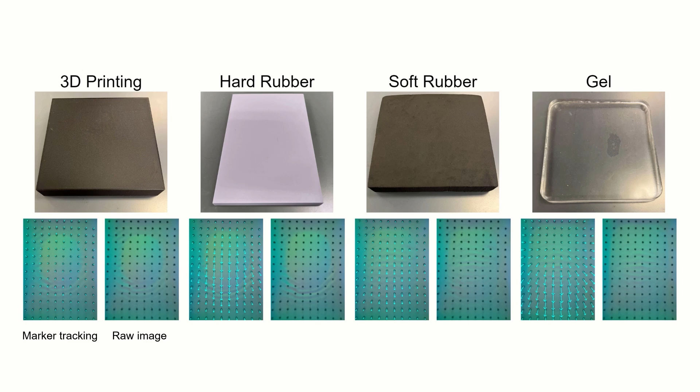To collect the necessary data for training, we used 4 standardized blocks with different material properties. We developed an automatic data collection pipeline that recorded tactile images and gripper states under different grasping forces and external drag forces. Finally, we recorded the gripper positions when slipping occurs as labels.

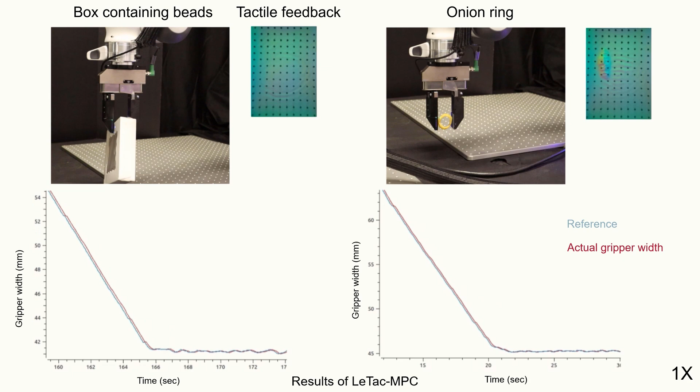In the first task, the goal was to grasp various daily objects. When the object came into contact with the gripper, the gripper width gradually converged. After this, the manipulator dynamically transported the object to the target location.

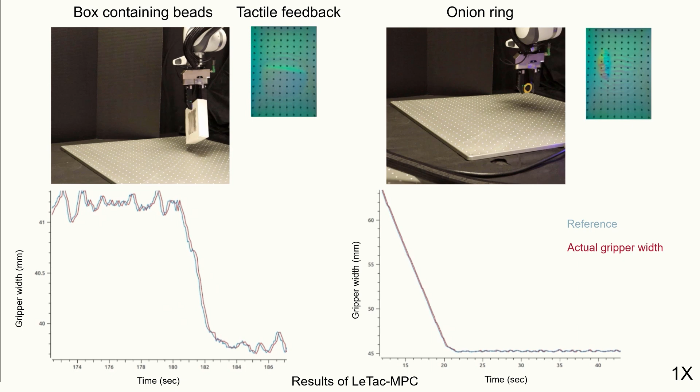For objects with rapid changes in acceleration and inertia, such as a box containing beads, the LeTac-MPC enabled the gripper to reactively regrasp the object to stabilize it in hand. Finally, the gripper width converged again.

Although the tactile feedback for soft objects is subtle, LeTac-MPC can still converge and grasp them robustly.

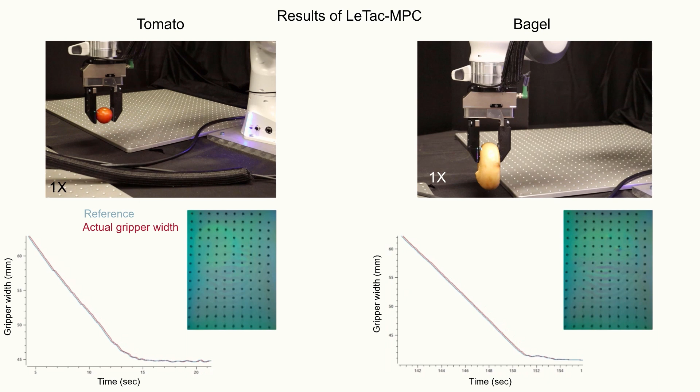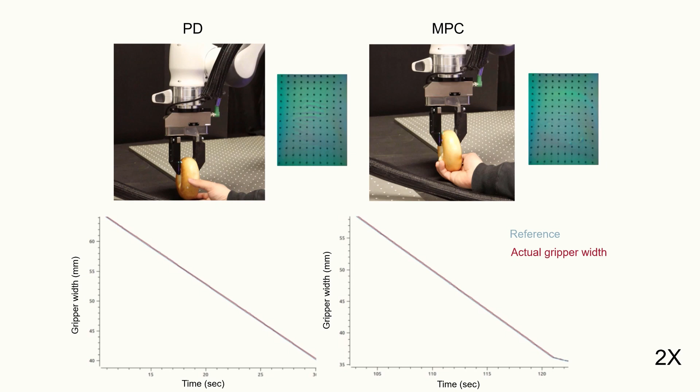However, we observed that both MPC and PD controllers failed to converge, and the gripper motion could not track the reference generated by the grasping controller. This indicates the MPC and PD controllers continually decrease the gripper width until it reaches the force limit of the gripper.

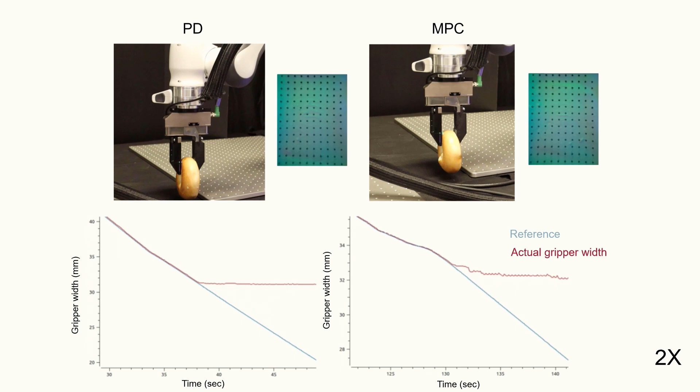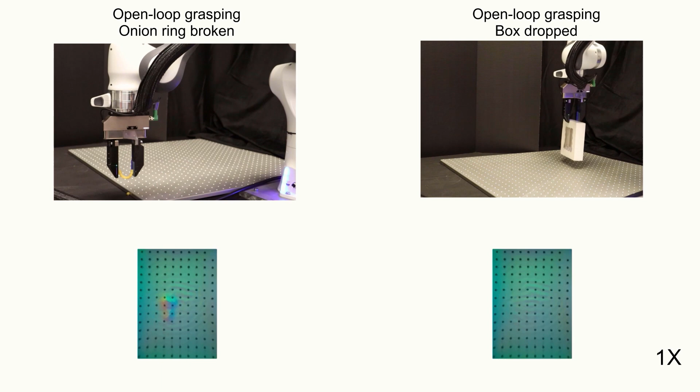For open-loop grasping, because it cannot reactively grasp based on the feedback, it will destroy fragile objects like onion rings and drop objects during dynamic transportation.

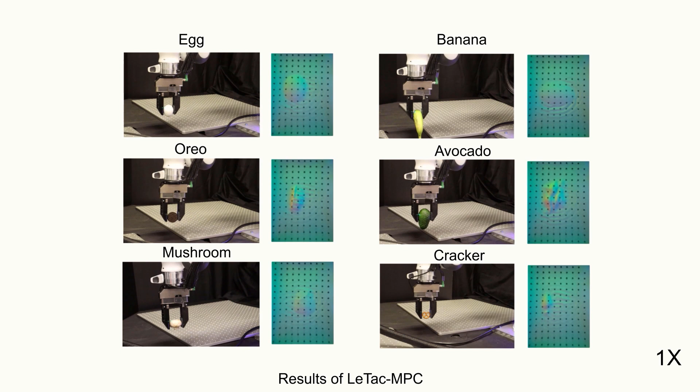Our proposed LeTac-MPC demonstrated excellent generalization abilities. Despite being trained on a limited dataset consisting of only 4 standardized blocks, LeTac-MPC was able to successfully grasp various objects with different physical properties, sizes, shapes, and surface textures.

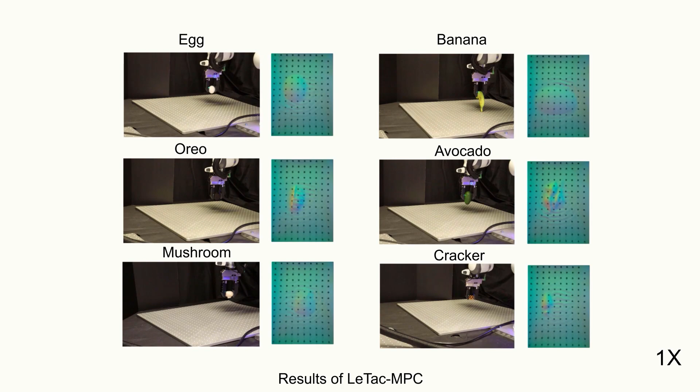Finally, we attempted to grasp a peeled boiled egg, which proved to be an extreme case and an ultimately unsuccessful experiment. The tactile feedback generated by the egg was so subtle that it was almost invisible, regardless of how much the gripper continued to contract.

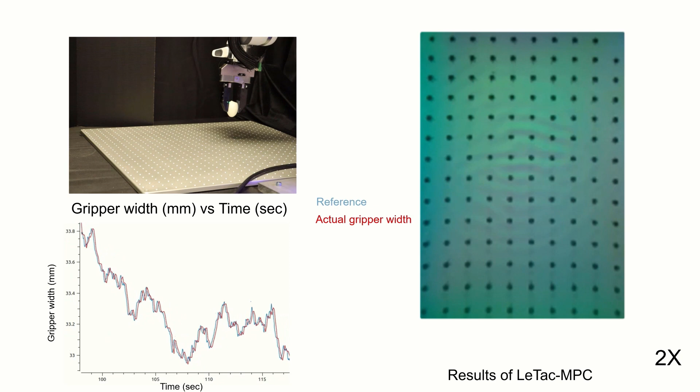This resulted in incomplete convergence of the controller, causing the gripper to slowly contract at a very small speed. As the egg deformed and slipped in the gripper, the speed of contraction of the gripper increased, eventually leading to the destruction of the egg.

However, the process lasted about 50 seconds. Therefore, LeTac-MPC worked to a certain extent for a peeled boiled egg.

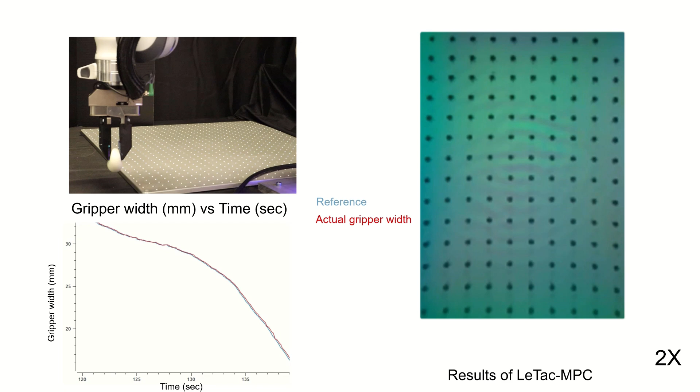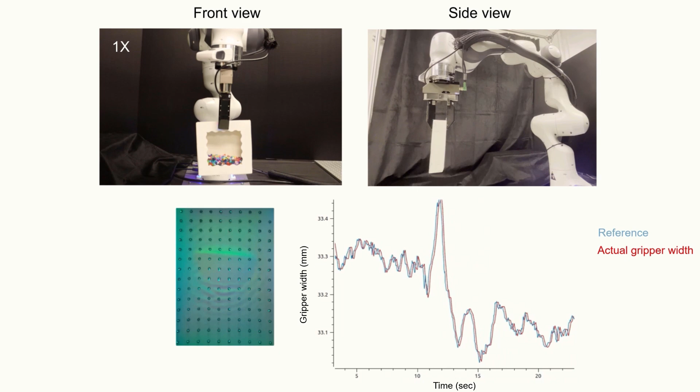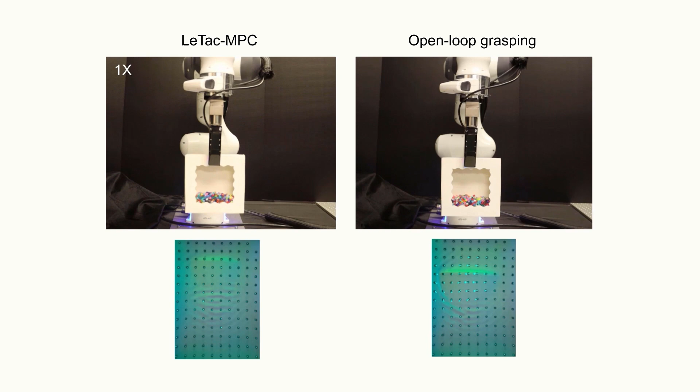In contrast, open-loop control failed to handle the dynamic shaking, causing the box to be easily dropped due to the lack of reactive behavior.

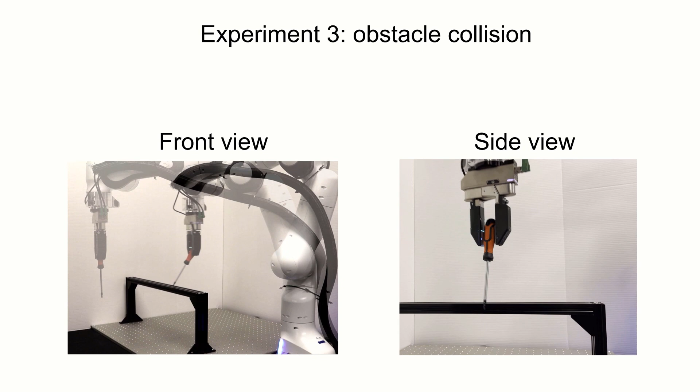In the third experiment, we tested the effect of collisions on LeTac-MPC. We had the robot grasp a screwdriver and then collided with an obstacle, simulating an unexpected collision that can occur during some robot manipulation tasks.

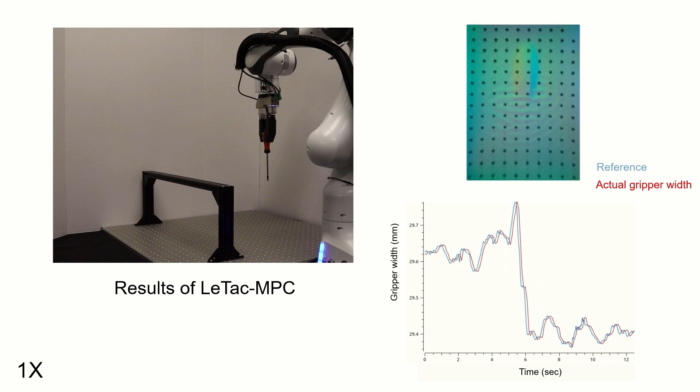During the LeTac-MPC experiment, the screwdriver became loose in the hand due to the collision, causing the gripper to rapidly contract to regrasp the screwdriver. However, open-loop grasping could not handle this type of external impact, causing the grasped object to drop.

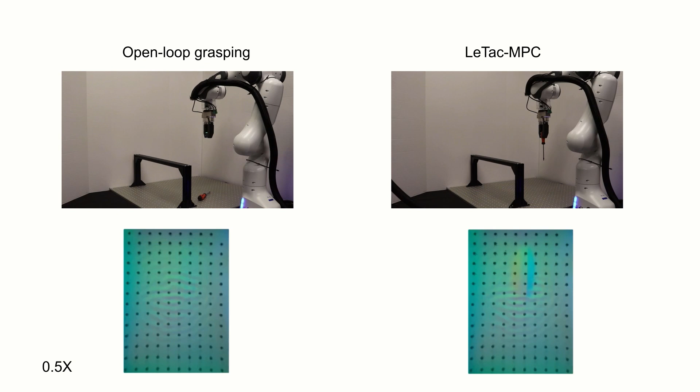Here is an experiment with a different obstacle. We can see the same result.